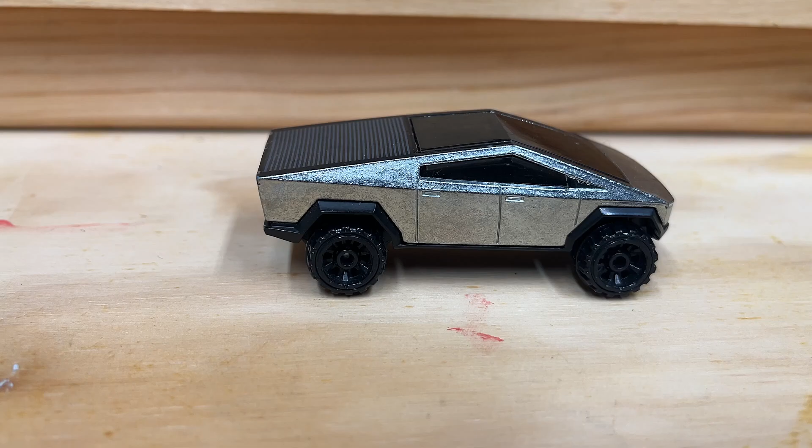When we're learning drafting, we need to know the basic terminology - front, top, and right views, where they're at, how to find them, and all of that. And when I'm teaching things, I need a good visual.

So let's design one. The idea here is that we're going to make some type of shape - I'm thinking like an L shape that clearly shows the front, top, left, right views with text, and also has outlines on the edges.

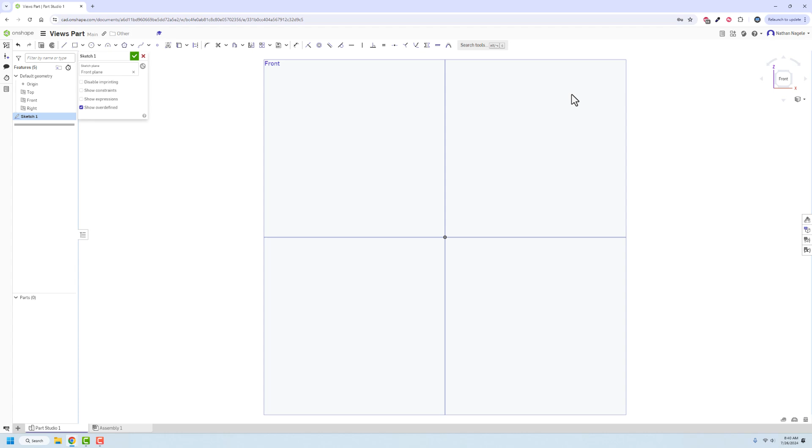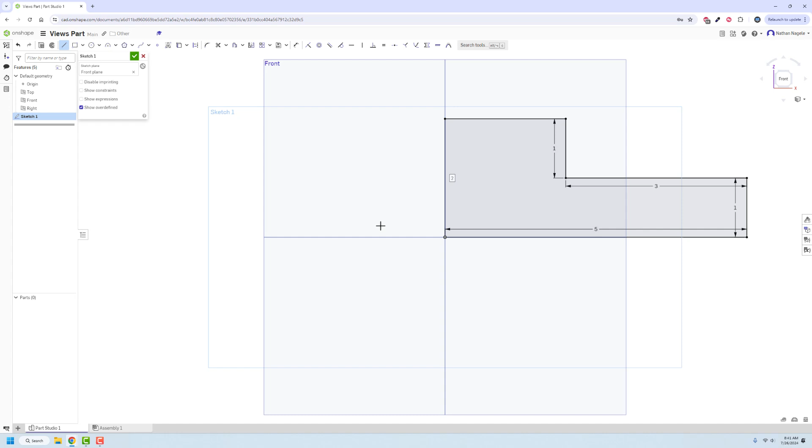First off, we're going to start with the general shape. It needs to be large enough that you can view it from a distance, but small enough that I'm not using tons and tons of filament. So I think something like this works. I'm going to make it a total of 5 inches by 2 inches tall by probably 3 inches deep.

All right, so now I have that. I drew that on the front view for a particular reason, because this is going to be the front, this is going to be the top, the right. You get the idea if you've done drafting stuff.

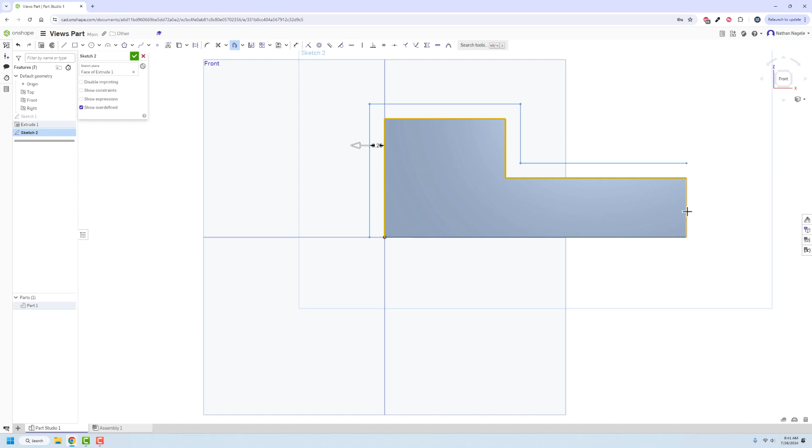So I'm going to sketch on here, then go to offset and pull in these edges. All of these edges here are going to get cut back just a touch, which will make more sense in a moment. I'm going to go with something really small. We'll finish that sketch, and I'm going to extrude that by the same amount.

So I'm going to remove that 0.075. The idea with this is that there's going to be a cutback reveal. Actually, I'll do that way less. So let's just do that.

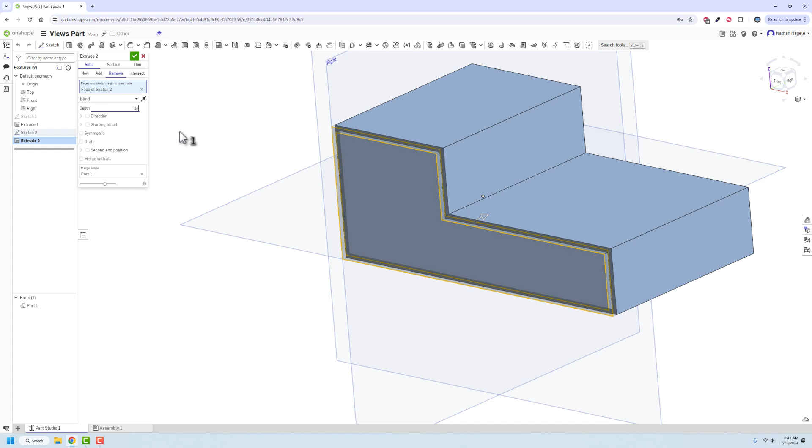Yeah, that's better. The idea here is that I'm going to color this one color and then here another color, so there's a visual difference and you can see the edges of stuff. I often find my students struggle seeing those small differences, so I want to bring that up.

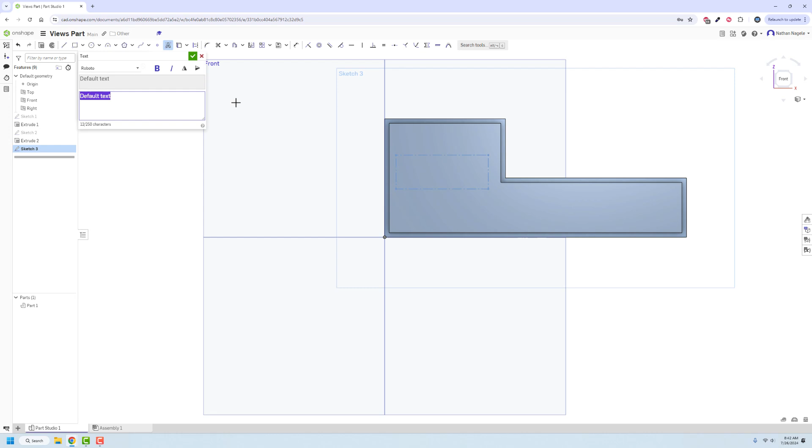We're also going to put on the words themselves. So we'll go into our text tool, drag it in there, and just type in 'front.' And Roboto's fine, I guess.

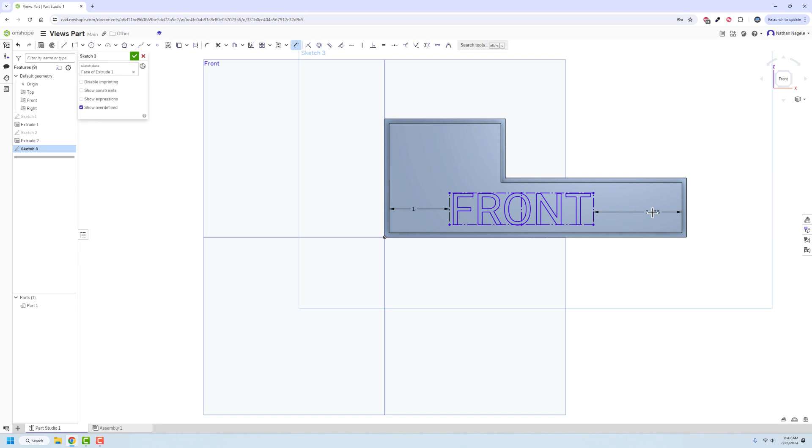Then I need to dimension this so it's going to fit where I need it to fit. Where do I want to put it down there? That's fine. I am going to dimension from side to side though, just to make sure - 1 inch there. Let's do 1.25 inches on both of these.

We'll finish that, and then we're going to extrude the whole text area out the same. So now when I export this and bring it into Bambu Studio, I'll be able to set colors for these back areas and then the main piece.

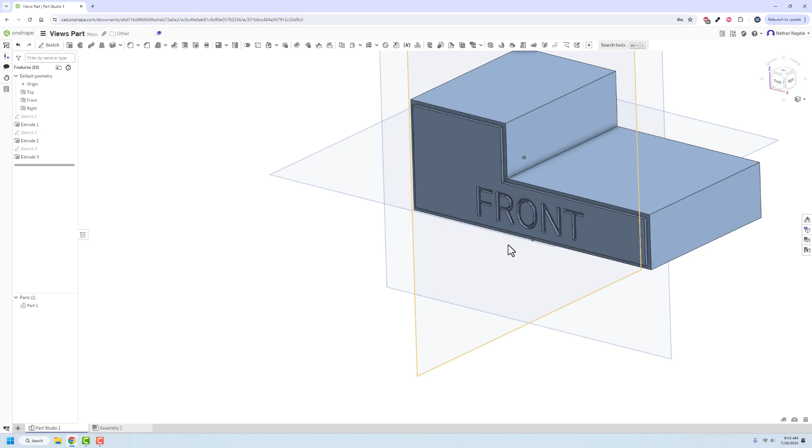But I need to do the same thing with all of this. So I'm going to sketch on here and do the same thing - go to offset again. We'll drag there, there, there, and there. Oh, it's not going to let me do that one.

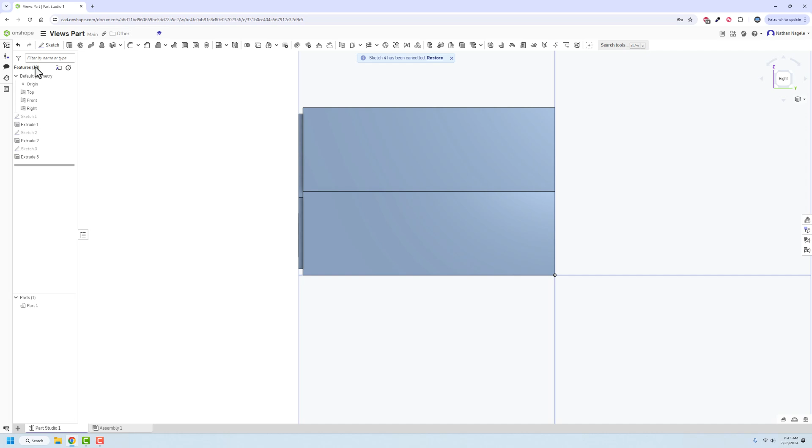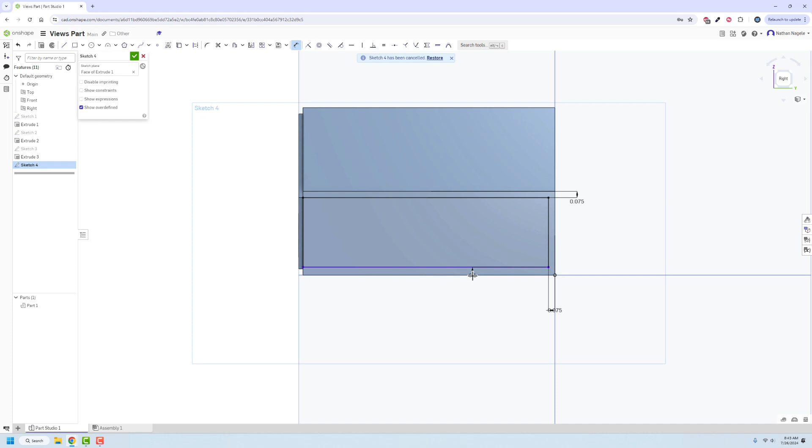Okay, so what I can also do is go back into Sketch and hit G for rectangle and offset all of that. I'm just going to the edge here because I don't need it to go all the way up. So I did 0.075, did the same here, 0.075, and the same down here, 0.075. Finish that sketch, extrude just that little U shape, and remove 0.05.

Now I have to decide if I want to do it as the entire shape, all the way around, so you can see all the different views, or if I'm just going to stick with just this, to see the edges, which is what I'm more leaning towards.

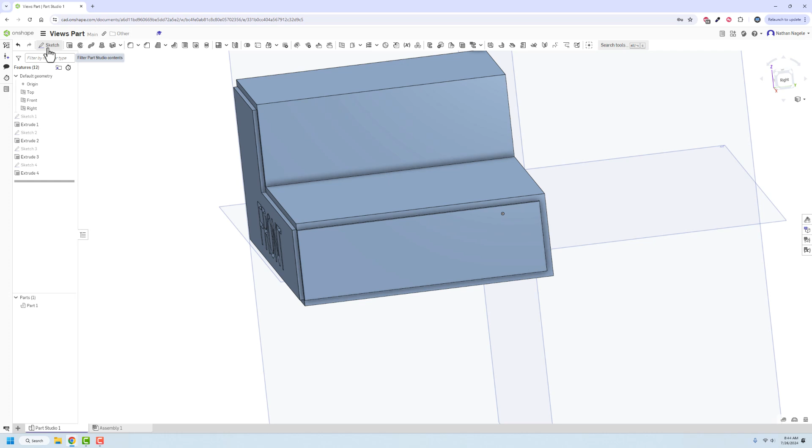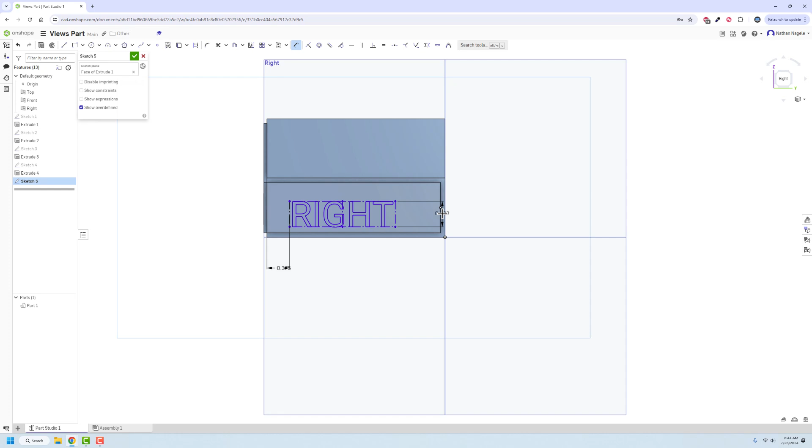I do need to sketch on there, and I know I could have done this at the same time, but I didn't - leave me alone. We'll go on here, and this is going to be the right view. So we'll do that, then dimension from there to there - 0.375. Does that work? And from here to there, 0.375.

I guess we need to set a height there. Oops, that's a little too much. There we go.

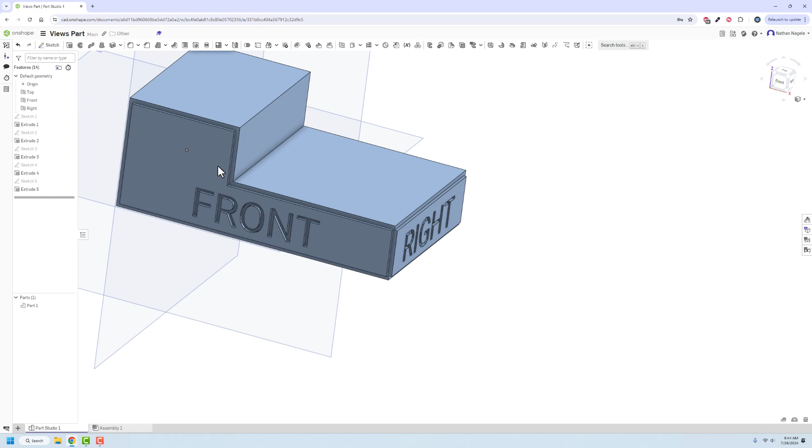All right, I'm going to continue going through. I'll get the top on here, the right there. I may do the left, the bottom—I may do all that, or I may just stick with the main ones. But I want to make sure that basically I have this thing so when I rotate it for my students, they can actually see what it is, read the stuff, and see the edges. So this main block is going to be one color, and the indents around the edges and the text will be a different color. We'll jump into that in just a moment.

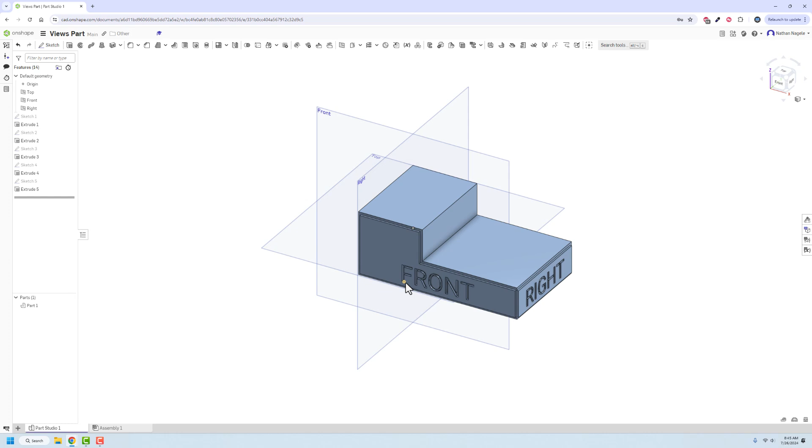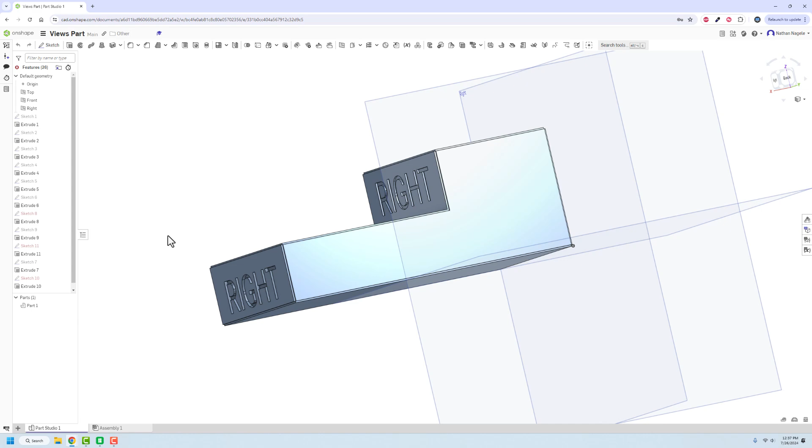All right, so here's the final model. I did scale back the cut-ins just a little bit because I realized, one, it doesn't need to go back that far, and two, I need to color both edges here in order for it to, when we rotate around, be able to see all the edges properly and fully. I did not add any words to the left side, the bottom, or the back, because really when we're looking at teaching this, it's front, top, right, and then obviously isometrics. So that's kind of the setup here.

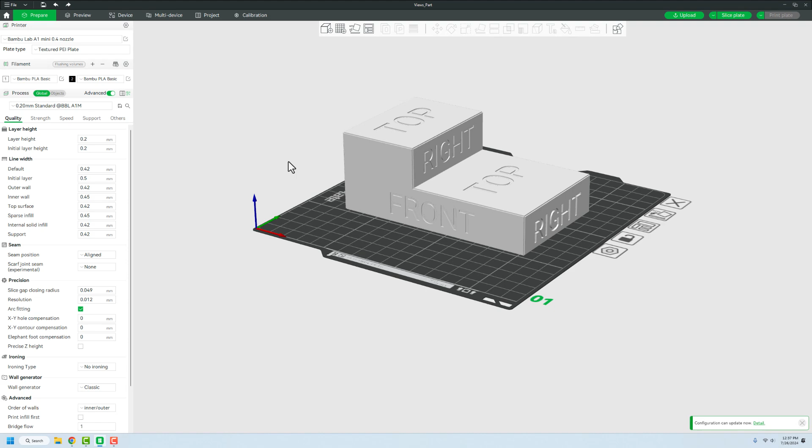So we're going to export that and bring it into Bambu Studio, and we'll see exactly what we have to work with here. So we'll open that bad boy up. We have it there, and then what we need to do is get this thing painted to be the colors that we want it to be.

So we have two choices we could go with here. I'm going to use black and white filament for this. It's just really, do I want the body to be black and the highlights white, or do I want the body to be white and the highlights black? I don't think it really matters, but we'll get it set up there.

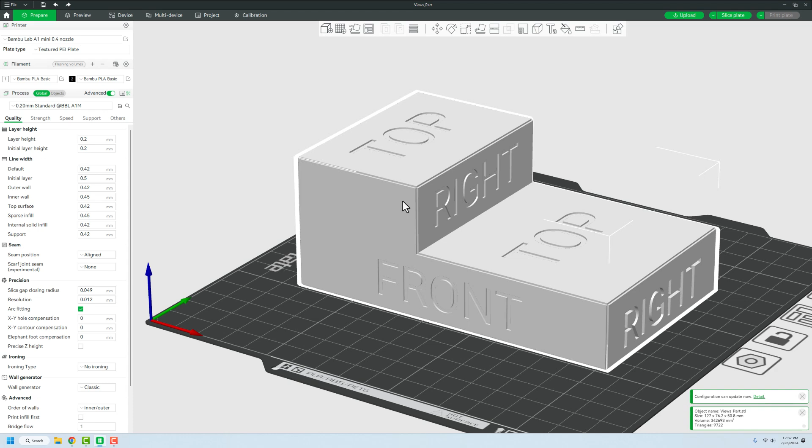So I'm going to click on this, and then I'm going to go up to this paint bucket on the top right-hand side, or I can hit the letter N. This is going to be our color painting tool. There are 5 or 6 different tools here: a circle, a sphere, a triangle, a height range, fill, and then gap fill.

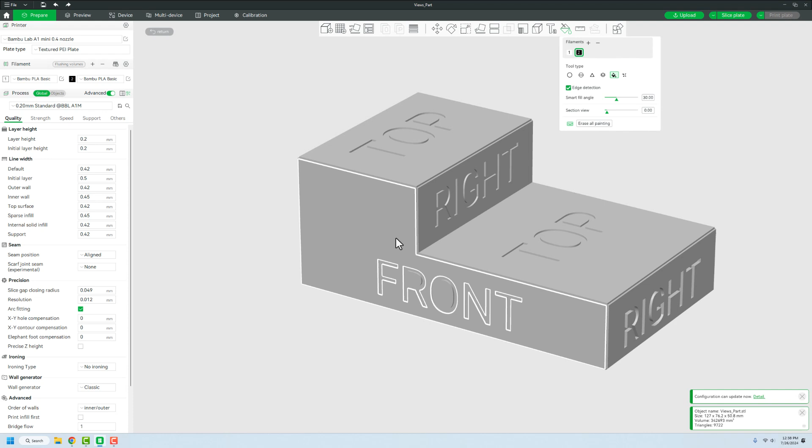I'm going to go in with fill on this. All I want to do is select my 2 colors, and I'm going to find all of these edges that I want to be black. So I'm just going to slowly start selecting all of these various edges that I can see. I'm going to do the same thing here with the letters, rotating through them a little differently. Oops, not that—and then we'll go through here.

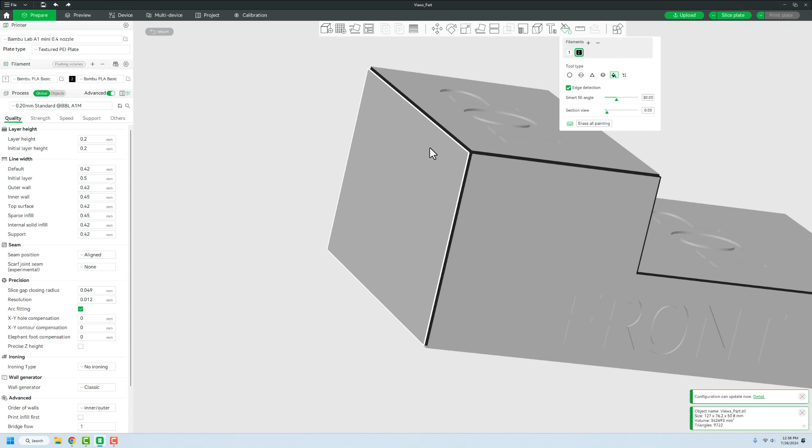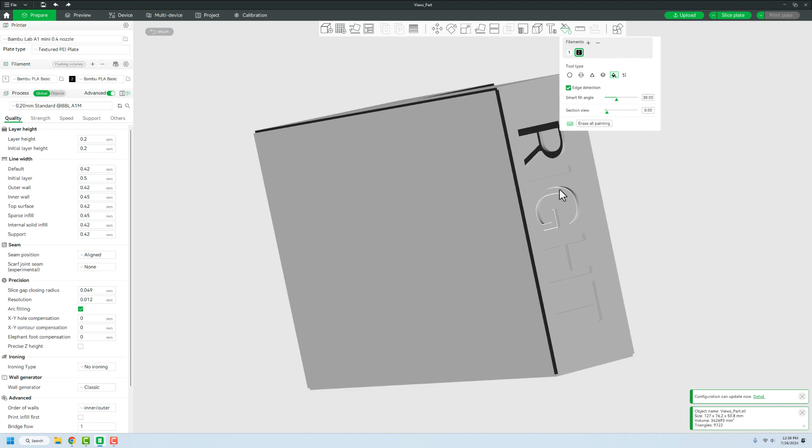One of the problems I have when working in slicing software doing this stuff is I'm used to CAD work, where rotating is usually holding the mouse wheel in and rotating. With Bambu, and I believe Orca Slicer as well, you just click, hold, and drag—just not on the part. So that's a little different, and that's why I misclick a lot in this program, because it's doing things I'm not used to. But we're just going through here, getting all of this stuff in there and set up.

And then we'll go through and get it printed. I'll be back in a sec with the slice and all that.

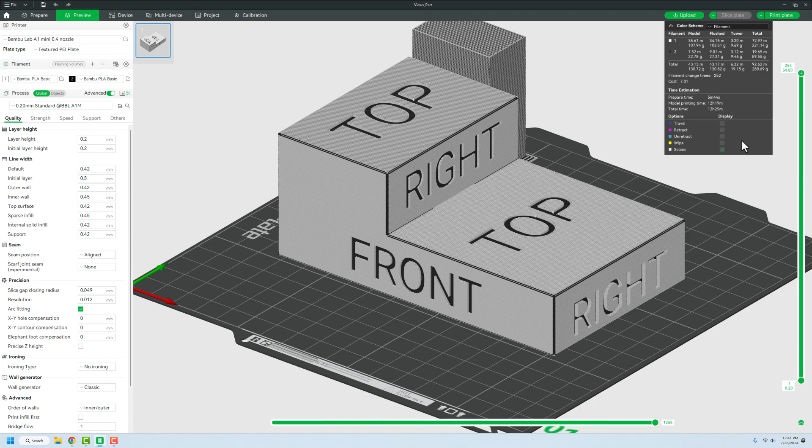All right, and here's the final version of the print for now. I may change some things here, but we can see it's a total print time of 12.5 hours. It's going to be a $7 part as far as filament goes, changing out filament 262 times, with total usage of 280 grams. The tower itself is only going to use 19 grams—you can see the wiping tower here. It is a beautiful hot mess. I can't wait to see how that turns out.

So we're going to upload this over to the printer. We have our colors selected, and we'll send it over to the printer, and I'll be back in 12.5 hours to see how it went.

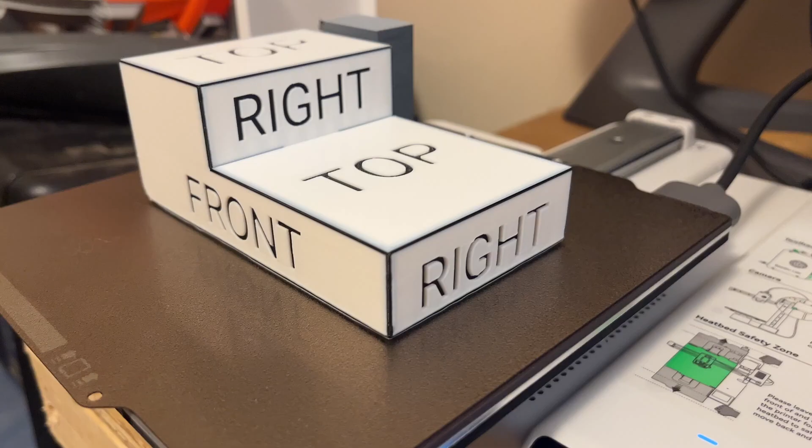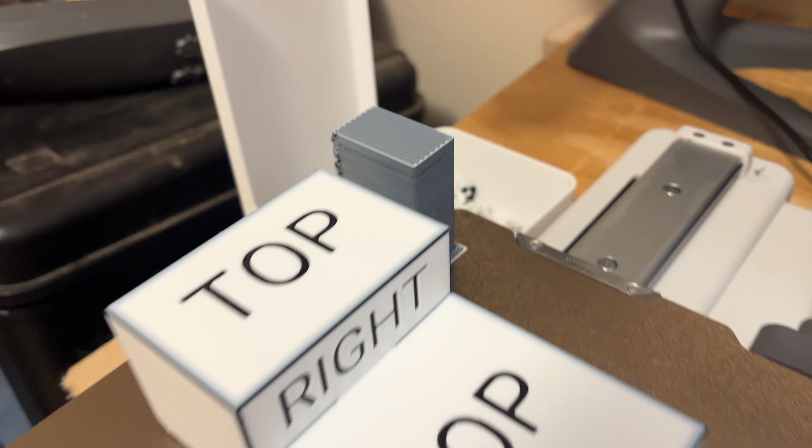Here is the final print after it's all said and done. You can see the top and right is clear, the tower looks beautiful, and there is a ton of poop. This thing wasted a lot of material—half of the print is really just waste material.

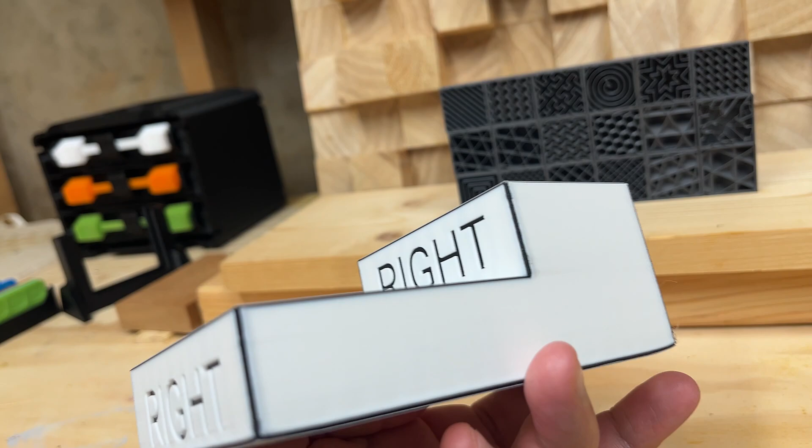Here it is a little bit more in detail. You can see the nice finished bottom. I didn't put anything on the sides, but you can see the outlines all there—we have our front, top, right. The idea here is that I'm going to be able to use this as an instructional aid, so I can show my students exactly what's what, where things go, and how to line up front, top, and right views as an easy visual.